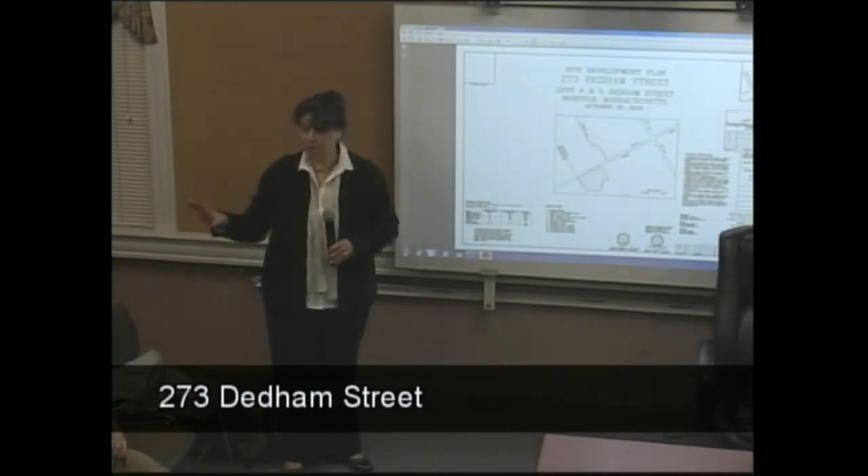The lots will remain in the ownership. There's no intent to divide the lots or convey any of them. So I don't think we're going to be looking at an ANR or anything like that in the future. The lots are all independently conforming to zoning, lot area, and frontage. And with that, I think the technical aspects of the site plan can be addressed by Jim. Before you do that, just point out the different lots so that we all see.

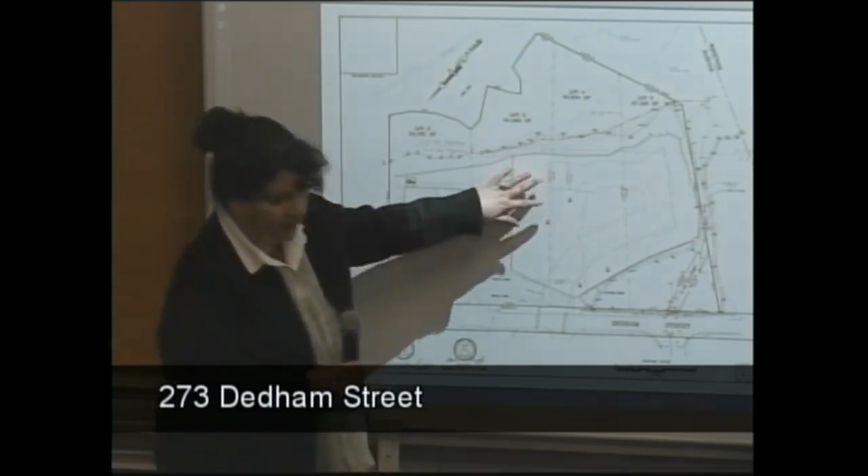So this is the existing building on 269 Dedham Street. Where's the boundary between that and the next lot? This is the boundary between 269 and 271. This is lot 2, lot 3. Lot 4 and 5 are together known as 273 Dedham Street. Okay. So you're working on lots 4, 5, and part of lot 3? The only thing that is, I think, over the line just a bit is some parking. Some parking and the snow storage.

Parking and snow storage. Right now, are these listed separately in the registry, these lots? Are these listed as independent lots? They are included on one deed, but they are separately described, and in the past they had been conveyed separately. They are also assessed separately. Lots 4 and 5 are assessed together as one lot, but lots 2 and 3 are separately assessed.

Because I believe to have this plan go forward, these things have to be combined as one lot for purposes of recording our plan. I don't think you can keep these, I don't think you're using the side setbacks and conforming to zoning based on a certain parcel. I believe that parcel has to be combined all as one. I know in the past, that's the way we've done it. The building on lots 4 and 5 will independently conform to zoning.

No, I understand, but you're putting a project on lot 4, 5, and part of lot 3. My understanding is all of that should be inclusive on one deed at the registry for purposes of this file. Maybe I'm wrong. I'm not sure there's any requirement for that. We can check it out.

Recording, I know in the past, we've had them combine the lots before we issue something, because right now we're using setbacks over a combination of three lots. I believe that's the setbacks obviously don't, you're going over. Right, so they have to combine these, yeah. I think you can check, but I think you're probably gonna find you have to combine these because your project is going over independent lots.

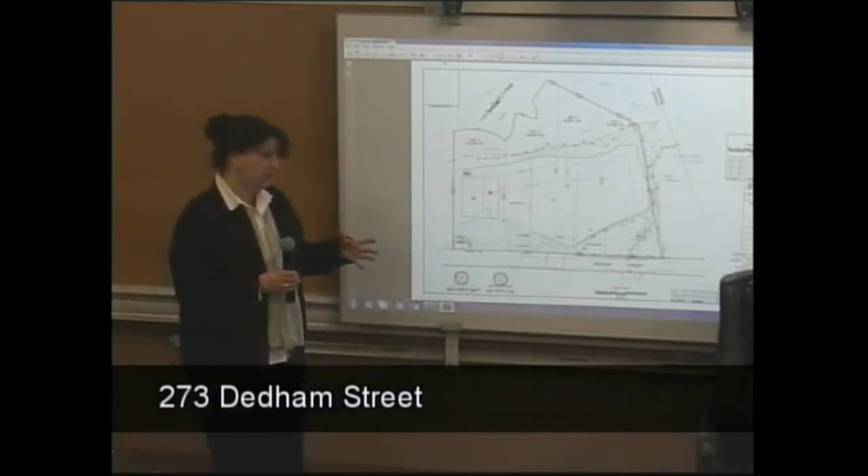Well, I don't think, in my experience, that that's the case. I think, you know, there's lot 2. Are you talking about for the purposes of the use or the dimensional? For the purposes of recording this site plan. It can be recorded and reference all four lots. Well, we can check with town counsel, but in the past, I know that when we've had adjoining lots with one project, we've had the person, after approval, before recording, have these all combined into one lot with the site plan recording. Okay, I'm not aware of that requirement. We can check and see, that's for sure. Yeah.

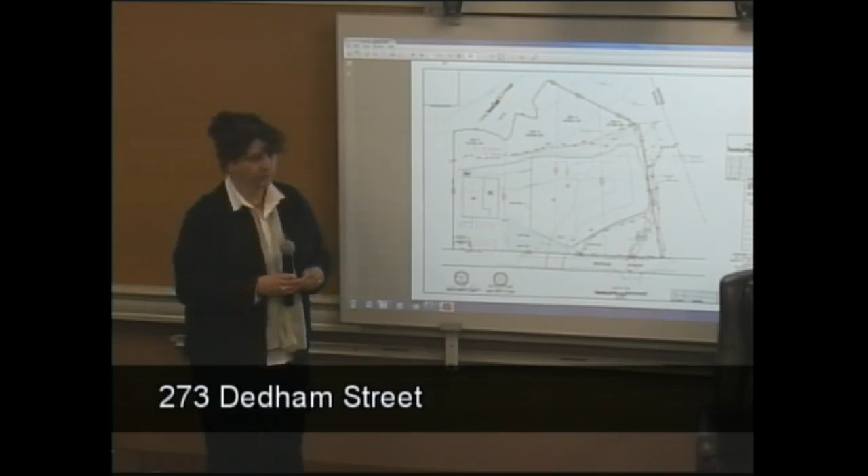Any other questions before I hand it over to Jim? No? Jim, you wanna? Sure. Good evening, Jim Soucy with United Consultants. Just identify yourself for the audience at home. I thought I did, Jim Soucy with United Consultants. Thank you, Jim. Not a problem.

We have the existing conditions before you of the entire site. The existing building is here, tree line in this area here. If you're familiar with the site, this is that 10 or 12-foot high steel fence, curtain, whatever you want to call it, and there's a chain link fence that runs across in this area right now. We do have a wetland along the backside as well as a riverfront and wetland down this side. There is an intermittent stream from the drainage that comes off of Dedham Street, comes down through here and then out and becomes part of the larger system out in the back.

Again, based on that, we have the 50-foot and the 100-foot buffer zones to that. There is floodplain in the rear. This line here is the limit of the floodplain based on the elevation from FEMA. Again, this is all currently wide open. There's a portion of it that's paved, and everything else to the tree line is gravel. Can we go to the next page, Beth, please? While you're doing that, you don't own that next lot over to the town line there, do you? No.

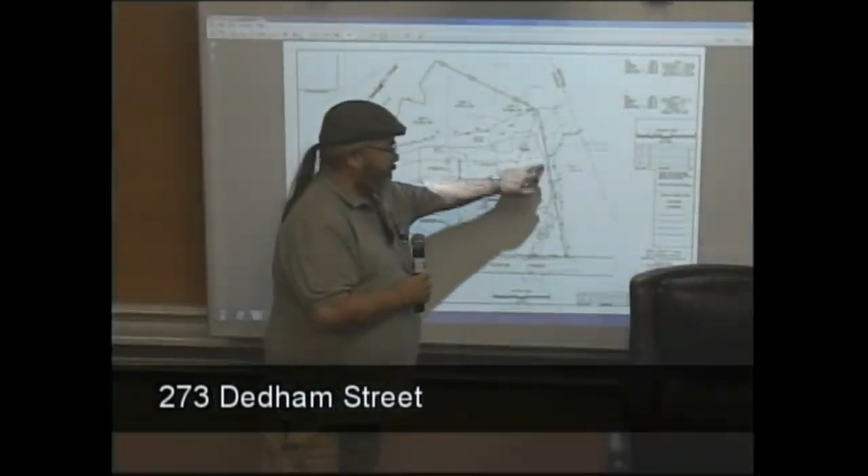Jim, where's the water flowing, basically? You don't have any structures here, right, drainage? Is the water flowing towards the back? Basically, it's going to be a sheet flow this way, John, to the sedimentation basin and the detention pond. Will it infiltrate at that basin? No, it will be detained there, then it will come by pipe to the rain garden, and this is where we did the soil testing to have the infiltration. Okay. Now, we did have a chance to go over Beta's review, and they had suggested an underground detention here instead of the rain garden to pick up the roof and the overflow from the pond. That's something we will look at along with all of the other comments that were on the letter today.

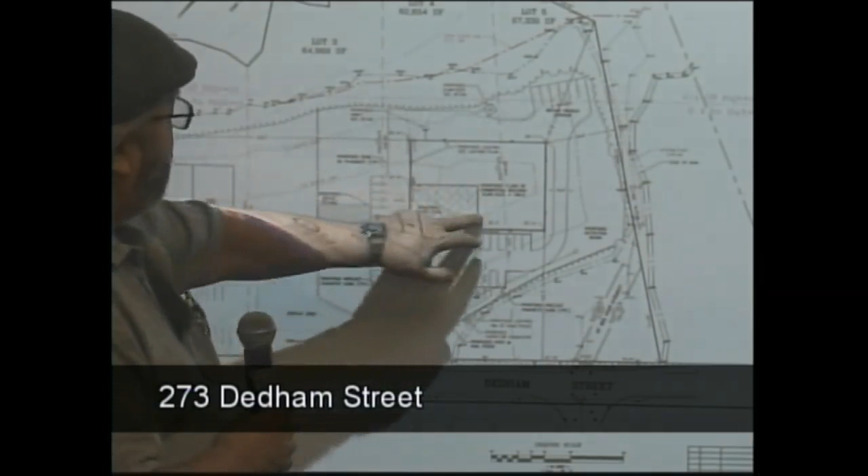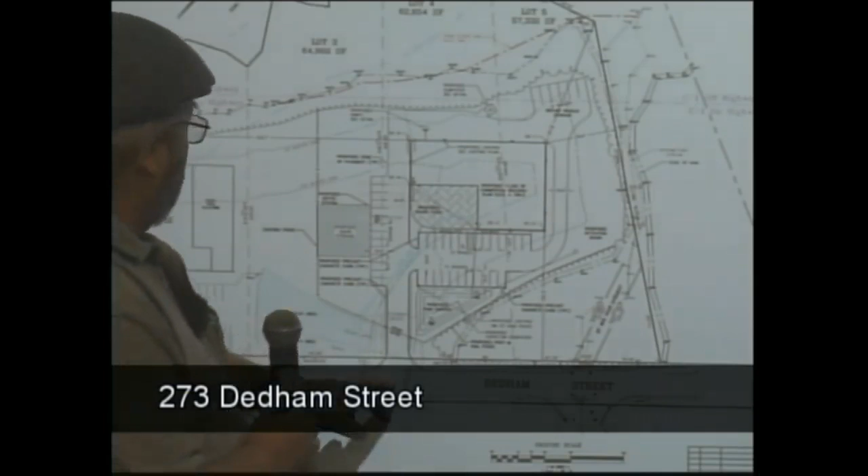So basically, the site layout, the building would be in this location here with like an open patio for a display of smaller lawn vehicles that are sold. Driveway would come in here. I've tried to align the driveway straight across from the one from the Eagle Brook. So the driveway would come in, there would be parking in this area, parking along in front. The driveway would go around the back, and we would have emergency vehicle access in this area here. Off the back side of this parking would be the snow storage area. Next, please.

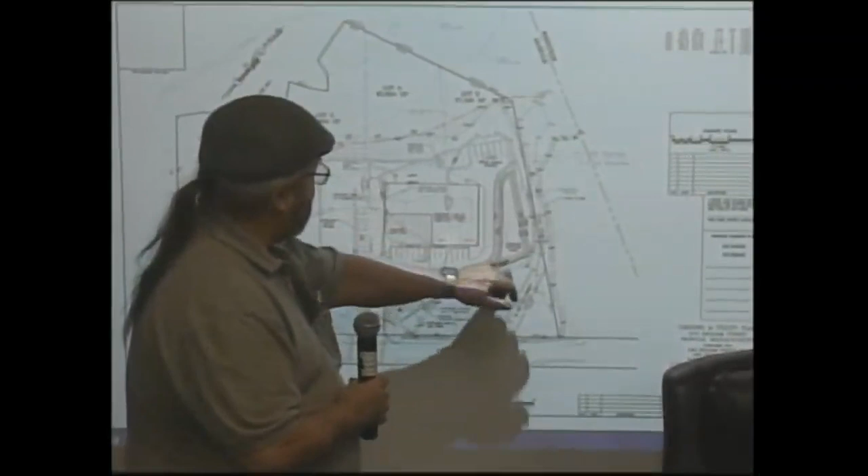So you can see here with the grading plan, everything is pretty much sheeting this way. All the runoff would be captured here in a sediment forebay, which would then go into the dry detention basin. That overflow would be piped to the rain garden. We also have the roof leaders tied into the rain garden. And then in this location here, we have an overflow dissipator rather than just have an outlet pipe that would shoot directly into the wetlands. I've designed a structure surrounded by stone, so that would come into that, and then as the water filled up, it would then cascade over in a broader, shallower method than just having a pipe shoot out.

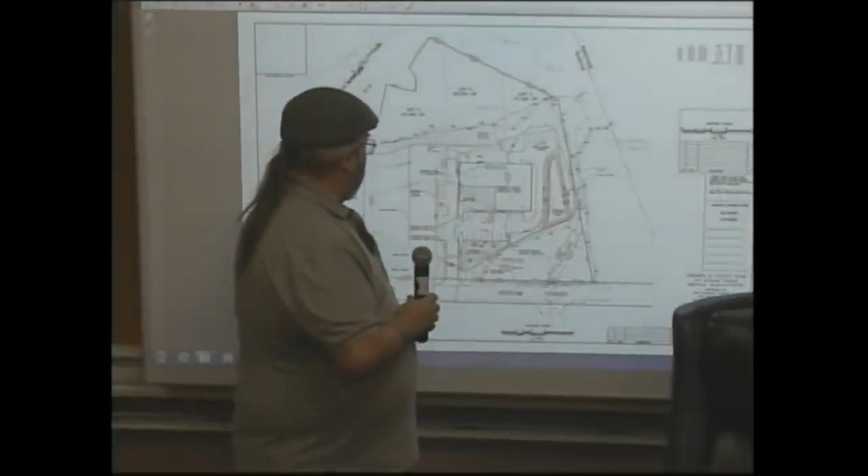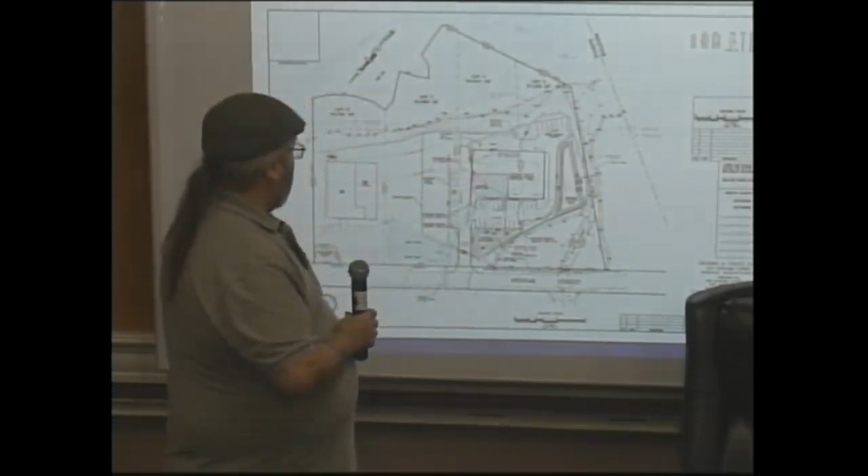Again, for the floor drains in the building, we would have the industrial wastewater holding tank out in the rear here. We have shown concrete curb, vertical concrete curb in this area to here and in here. I did notice in the peer review comments that it was your discretion as to whether we could have the waiver for the concrete curb as opposed to the granite, and he did note that he would like to see a berm around the rest of the parking area.

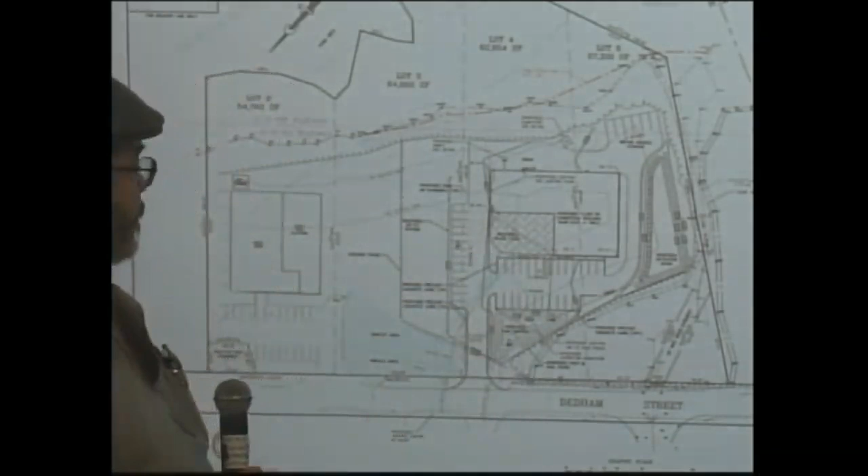Septic system would be in this area here, tank under here, come out. Water service, there would be two separate services coming in, one for domestic, one for fire protection. Next page, please. Before you switch, sure. When the overflow comes out of the rain garden, where does it go? It would go into the wetland. Via that little stream there, huh? Yeah, basically there's a huge wetland in this area that was, I believe, caused by this drainage outfall coming in and going. Gotcha.

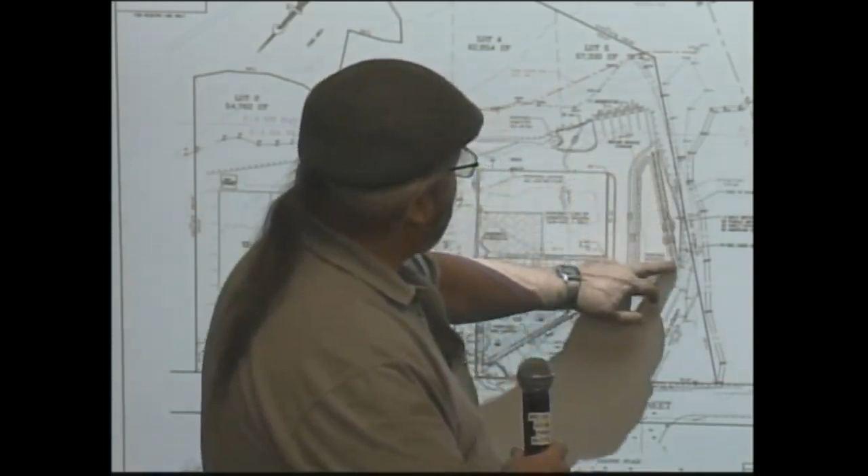This is the landscaping plan, which again we have several large shade-type trees here, and along in here. Infill would be with some shrubs. These islands, this island, shrubs along the backside there. Again, the rain garden has its own plantings, which that planting list is shown in the detail pages. And I believe we had another line of shrubs along the top of the berm there for the detention basin.

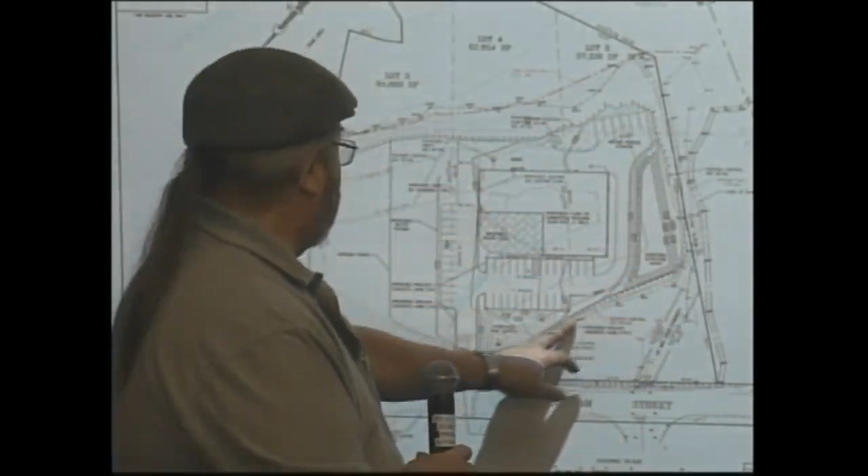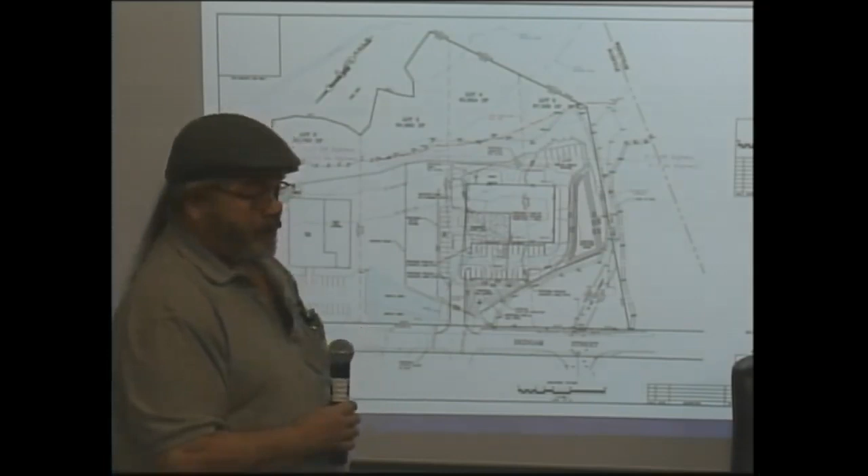Erosion control plan, basically we would start with an erosion control measure here, come here, pretty much all the way around the perimeter and tie back off in the front so that nothing can get out to the resource areas. Lighting plan, we're proposing building mounted lights in this area here, a couple here, and I believe 2 pole mounted lights here shining back. We have no spillage onto abutting properties with the lighting, and they are the shoebox style for direct downcast of the lighting.

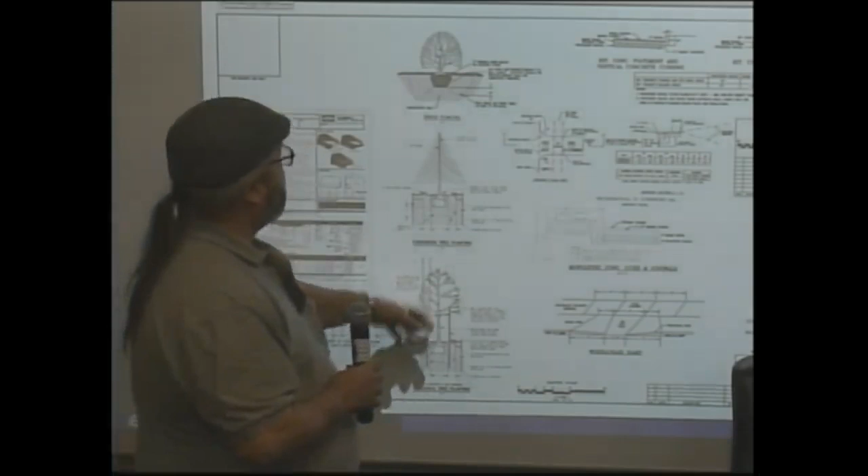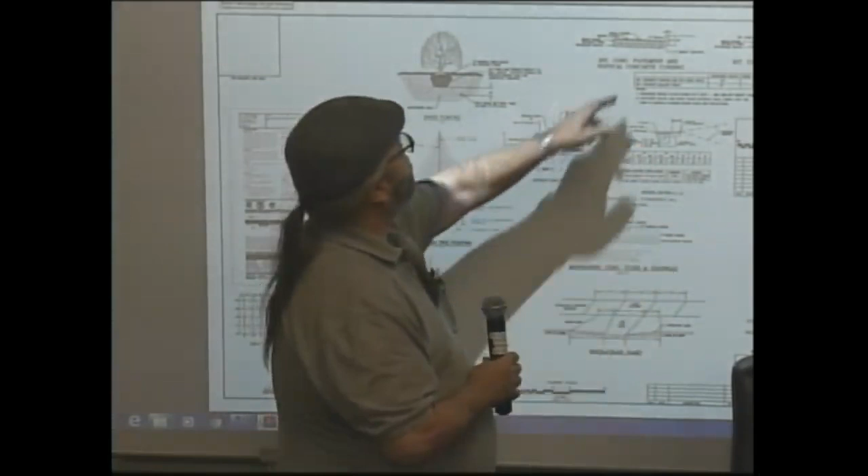And then these are just the construction details, showing the details on the light and the spec sheet on the light, tree planting and shrub planting details, the monolithic sidewalk curb out in front, wheelchair ramp detail, pavement sections. Again, more details, typical trench, water service detail, water connection detail for making the tap into the street and running the fire protection separately.

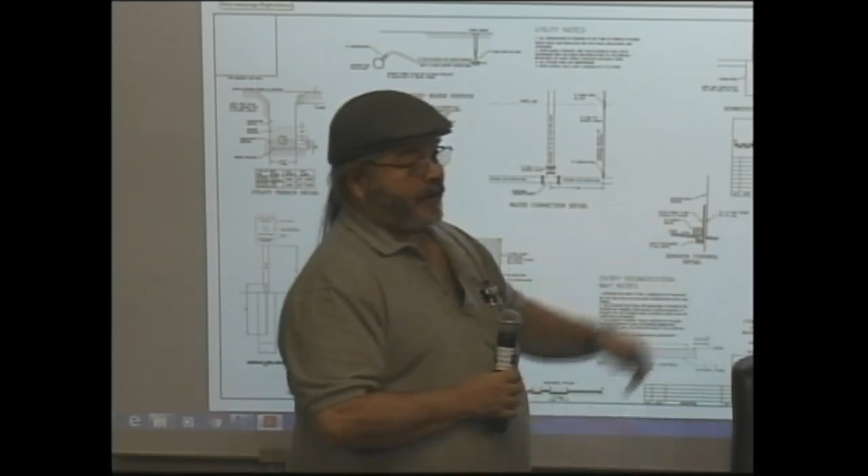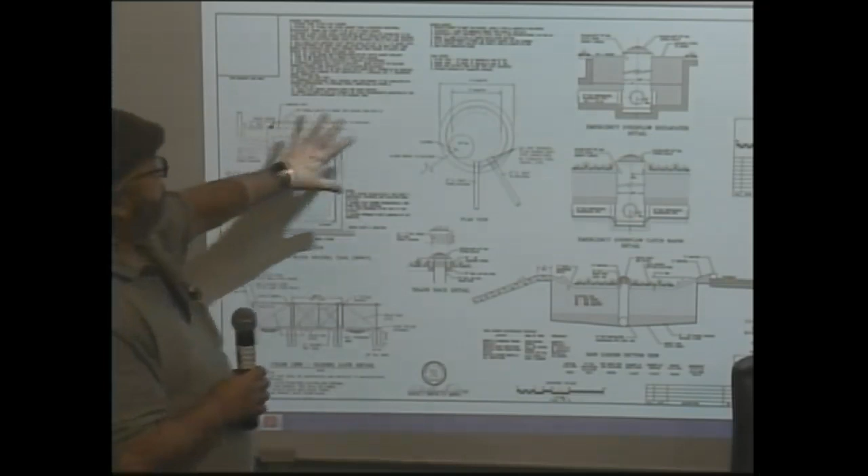The erosion control would be a 12-inch compost sock with a filter fabric fence behind it and an orange construction fence behind that to keep any debris from blowing off the site. The sedimentation entry mat here with details, the dumpster pad and the fence, and some typical sign details. This is the detail of the industrial wastewater holding tank. Chain link fences, sliding gate detail for the entrance.

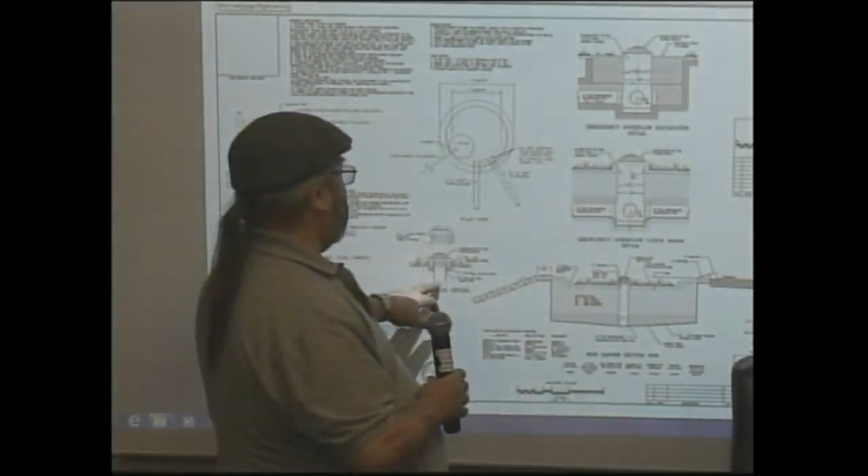This is a cross-section of the rain garden. Then within it, there are emergency overflow catch basins. There are several riser pipes as part of it that go to a drain underneath and outlets. And then this would be a detail of the overflow dissipator, which again is this 18-inch PVC catch basin with, I believe, 3.5 foot of stone all the way around it.

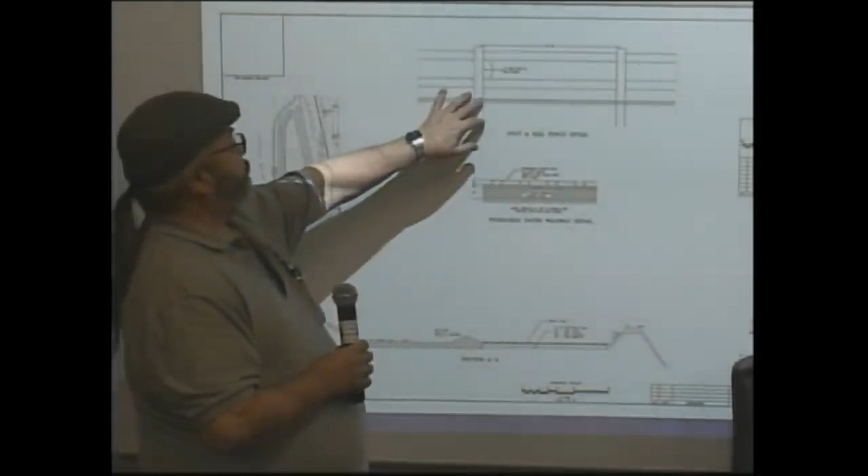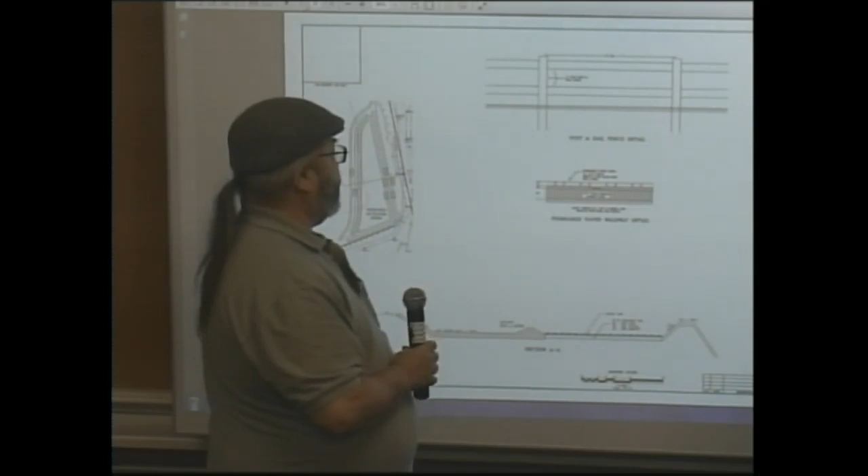Here we have the post and rail detail where the big high steel fence is now. That will all come down, and we'll install a post and rail fence along that area. Detail on the permeable paver patio out front, and the layout of the detention pond and a cross-section through the pond to show how it would be constructed. So Jim, where is the fencing right now? I'm having trouble following it. Betsy, can we come back to like page 3, please?

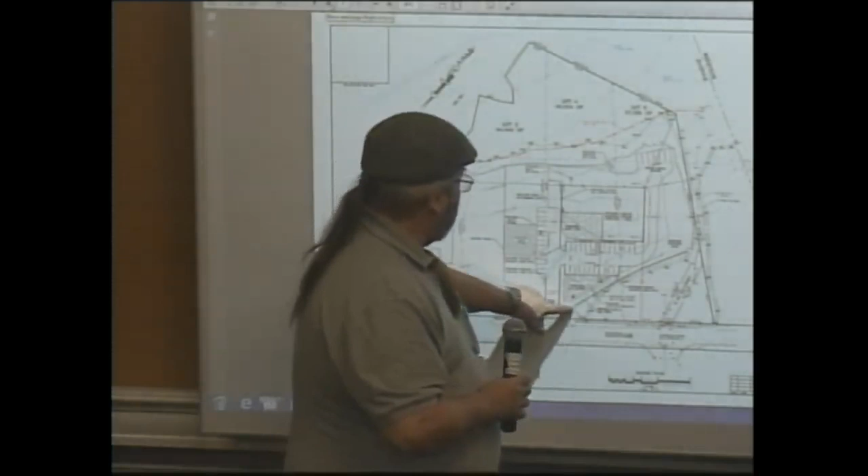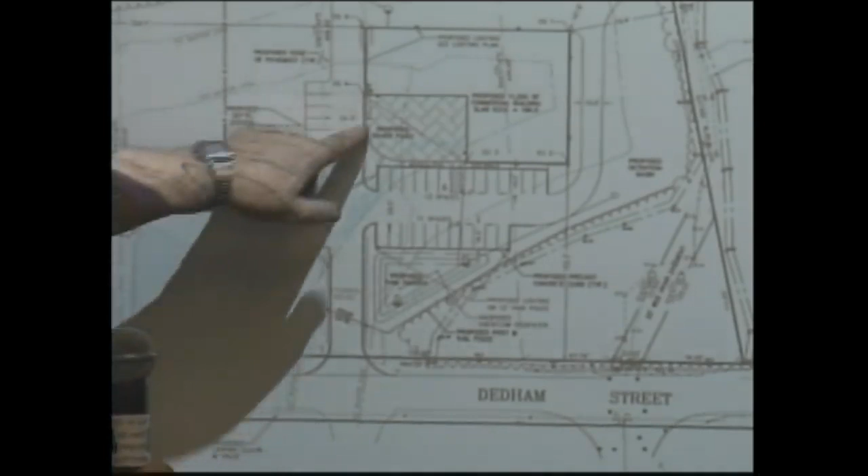Okay, we're good. Right now, John, that huge fence is in this location here. We're gonna take that down, and then in this area here, we're gonna replace it with the split rail fence. So the current display is in the front of that fence now? Where's the display right now? Right now, the display area is in this location here, okay? And it actually extends out to about here. So we're gonna be eliminating this section of the existing display. Right. We want to leave this, and then he could have some display up here for the mowers and the snow blowers and the smaller yard equipment that he sells there.

So this is gonna be a sale of used vehicles and repair, is that it? So you need what, a class 2 license? Is that what you're in, a class? We have. Okay, so it requires a class 2 license only? Okay.

I know the zoning on this is tricky. I know that you had some conversations with the zoning enforcement officer. He was supposed to give us a review of his thoughts, but this all came in kind of late, so we'll probably have it before the next meeting that he can send you, because some of this is grandfathered, correct?

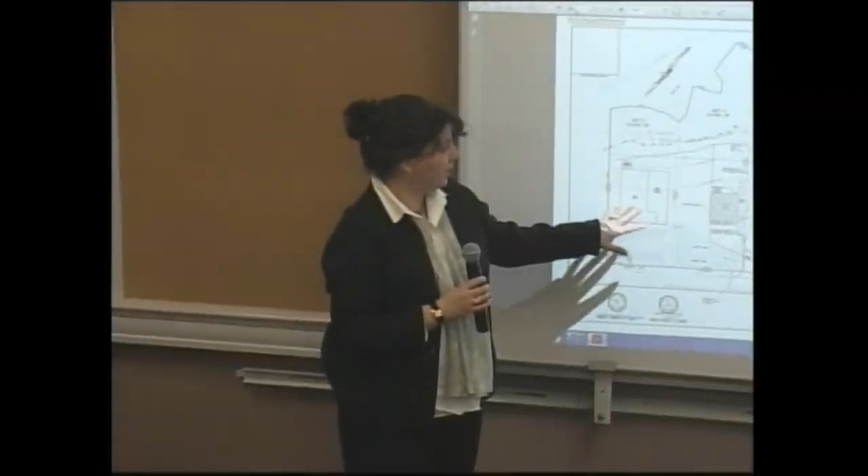Yes, in 1981, a special permit was granted to allow the auto repair use on 269, but the special permit does benefit all of the parcels. So we actually discussed this with Mr. Bullock last year, and town counsel agreed that the special permit could be applied to all of the lots.

I asked, because he said he had some issues with it, and what I'm stuck at, it gets back to the individually parceled lots. We can check on the special permit and the grandfathering that goes with that, but the special permit normally pertains to a use on a particular location. Why would it be granted to 3 other lots that were not in use? We're going to have to find out.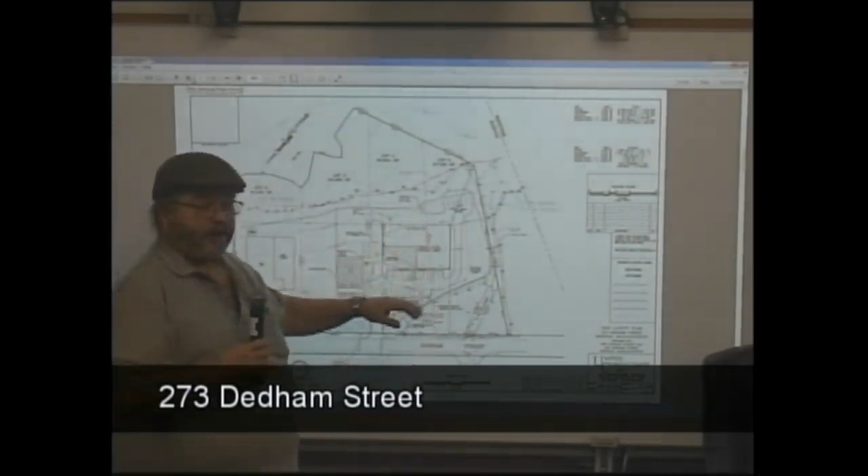I actually think that's a great point. Does the rain garden, Jim, have to go there because of the elevation? Well, if our suggestion from our consultant is to put an underground drainage tank, underground recharge as opposed to the open rain garden, that really takes care of that surface area too. I just have one question as it pertains to that. Would I have to go out and do additional soil testing, or have we done enough soil testing on the lot to satisfy?

So I don't think we were able to ascertain from where exactly your tests were. But I would recommend that you do additional testing to potentially put it in a better place and provide greater information. Okay, so if we are gonna move this over into this area here, we would have to go and do soil testing in that area. Yeah. Okay, I just wanted to clarify that.

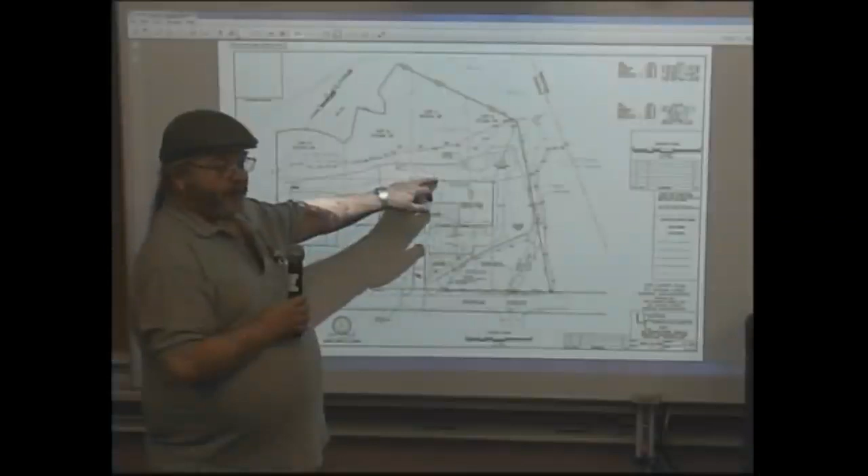As a minimum, Jim, you have to have test pits underneath that underground storage tank, by our rules, I believe, just to make sure there's a 2-foot separation to groundwater. For this tank here, Joe? If you put a tank out the front where the rain garden is, underground recharge, yes, you've got to have test holes there just to prove the 2-foot separation.

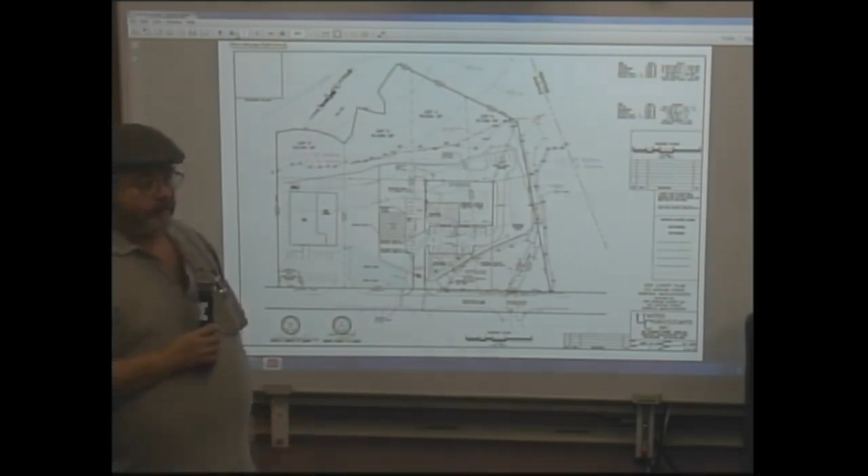Like I said, we've got a test pit there and a test pit there for the septic system, and we did 2 other test pits in this location here. Right. They need to physically be underneath where the recharge structure is going. Right, that's why I just wanted to clarify whether we needed to do that, or if we had enough soil testing on the area to verify these are the soil conditions. We don't have a problem doing additional testing. I think you folks have an opportunity to do a real nice setup here. And, you know, see if we can help.

Do you have any elevations of the building yet, or haven't you got that far? No, they're still in the works. I had some preliminary ones. Oh, all right. That'll work. At least it'll give us an idea what your thinking is. Oh, here we go. So is the project primarily sales or a combination of sales and maintenance? Sales and service. Of what kind? It'd basically be automotive and small engine. Okay.

So which building would be facing the roadway? I think the top one. But the garages would be in the back? Yeah, the garages would be in the back, correct. We may have a door on the side, just for better access. Okay. And this fence right now, that's existing, the one going down perpendicular to the street? Correct. Is that a stockade fence or chain link? It's metal siding, yep. And that's staying? No, that'll be coming down to the post and rail. Okay.

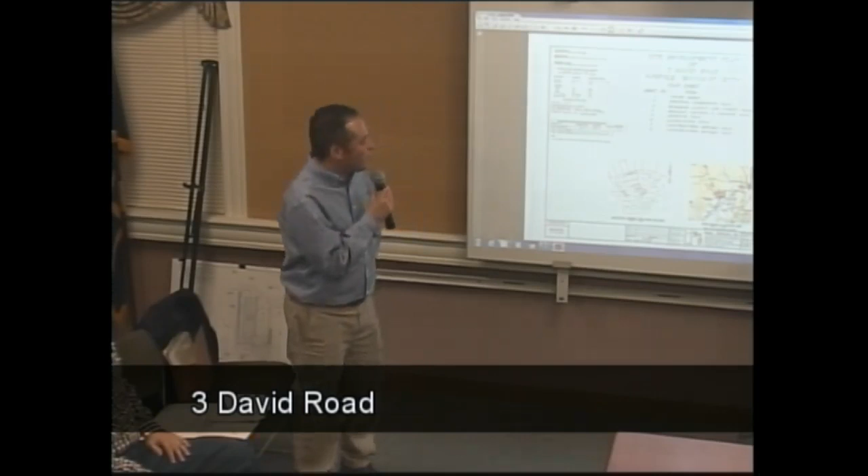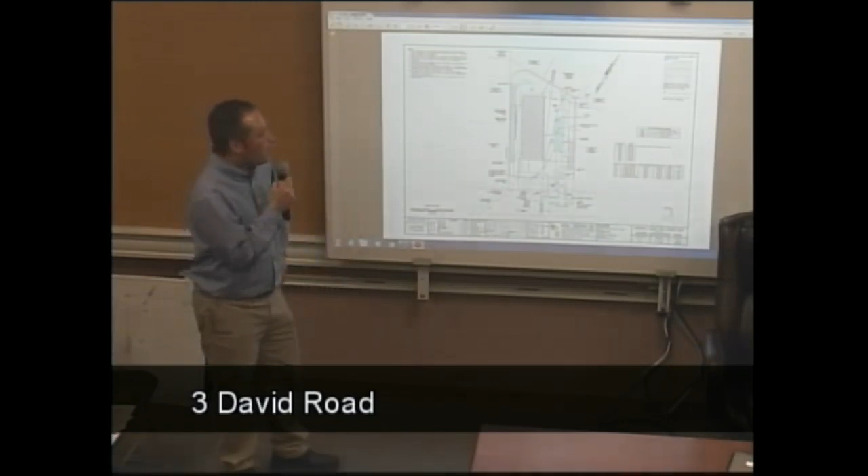I don't know if the best way is to put the drawings up, Betsy. Maybe you can just start with sheet one. I know we haven't formally been before the board with this project because it got continued, but the basics are: it's a less than an acre commercial lot within an existing commercial subdivision, and we're proposing a 6-bay commercial building, shown over here, with associated grading, stormwater, utilities, and septic system.

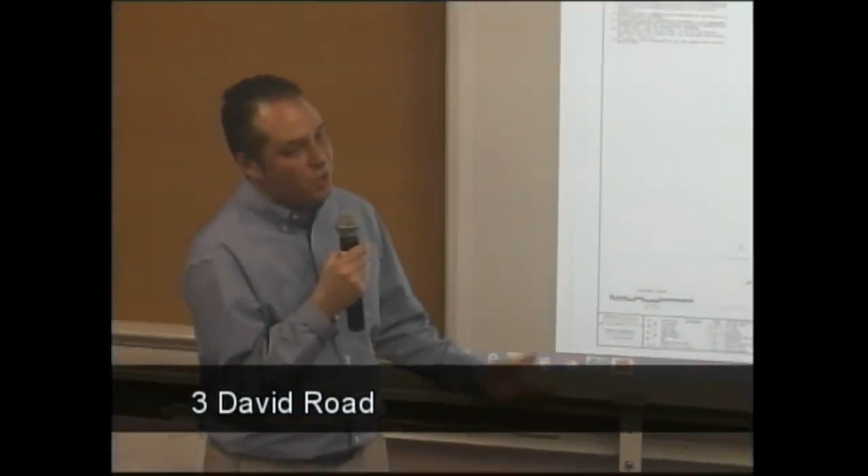We submitted a number of months ago. We had some back and forth review comments initially from Beta Group, and we had a great meeting with them back in November. Since that time we've modified this plan, the main driver being the drainage design, to work with the setback requirements. Maybe we could flip to the sheet we just submitted in the last day or so, which is also sheet 3, but a newer version.

I can explain the changes for the site. So is this lot pitching up to the back of the lot? It is, yeah. I'm sorry, I have trouble reading these numbers. Existing conditions: we've been working on this lot about 15 years. At one time it actually was cleared; it's since grown back in. It slopes from west to east. So there's a cut on the back of the building and a little bit of fill in front of the building where the parking lot is.

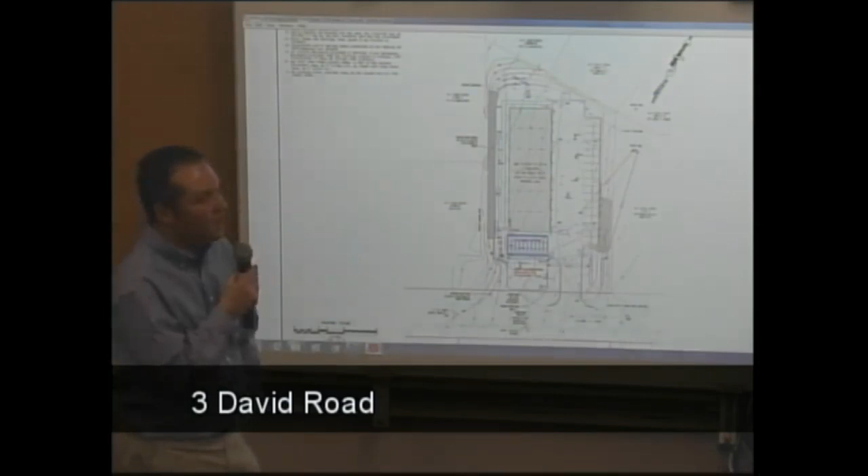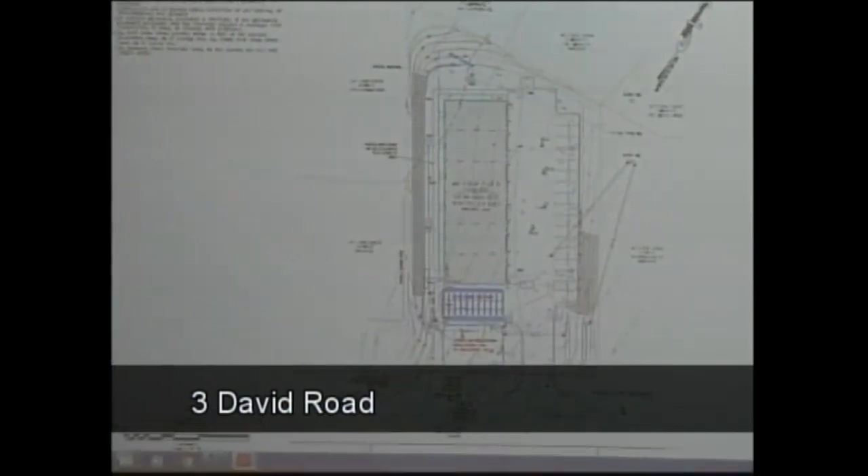There's 15 parking spaces, one handicap. It's a 7,450 square foot building. Again, with the 6 bays, there'll be a limited number of employees; we'll get a final count with the septic design. We met with Phil and Richard from the town back mid-November and fleshed out a lot of the review comments. So I'm hopeful that what we're presenting works for everybody and we can move forward based on this.

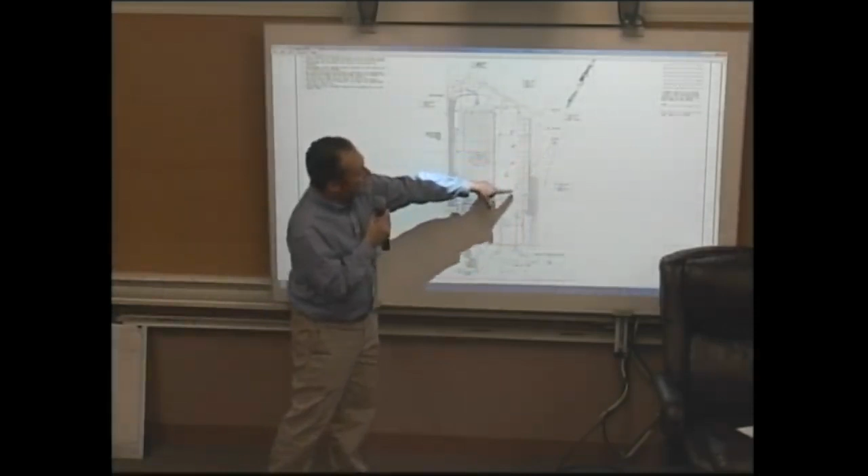The changes we've made: we've moved the septic system down into the southeast corner. That frees up space so we can get the 50-foot separation distance to the infiltration basin and infiltration chambers at the front of the property. It also allows us to maintain the well setback, which was a lot of the discussion. We're exceeding the 100-foot well setback to the nearest well, on the abutter's property. The well for this site is up in the north, and some abutters also have wells up here.

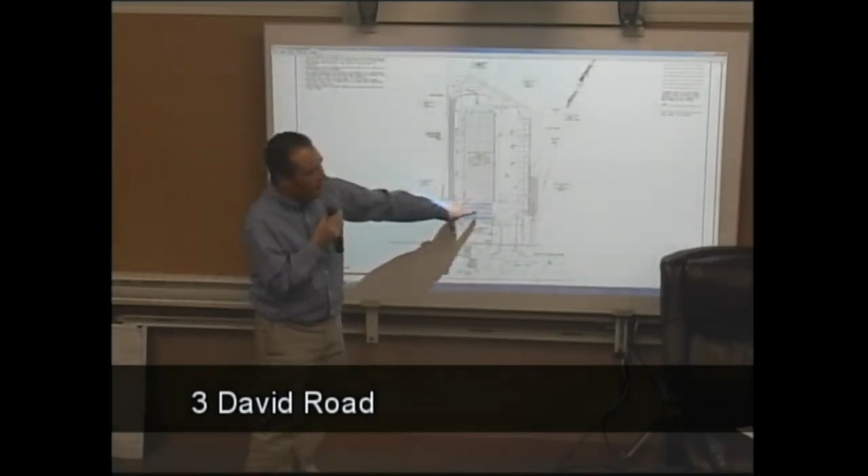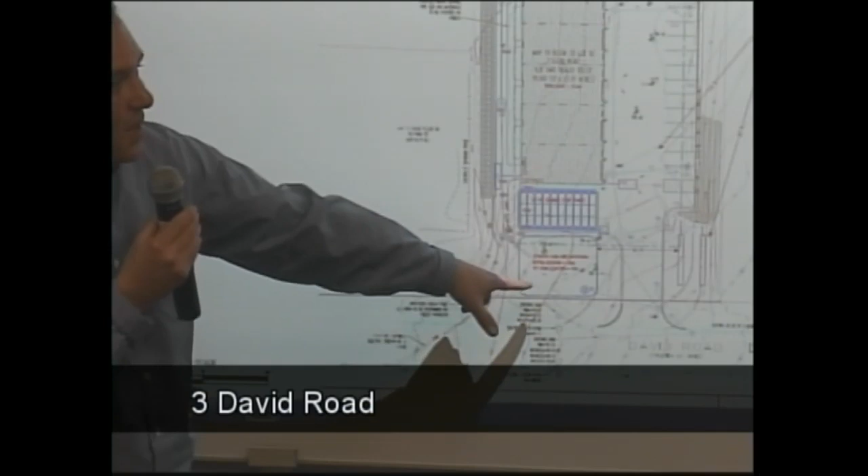We've also separated the roof drainage from the rest of the site drainage, going into the chambers beneath the parking lot. A new feature, in addition to moving the chambers, is a detention and infiltration basin at the front of the site. That allows us to meet the setback requirements to the well and the septic, and we've also adjusted the groundwater accordingly. That was another item we talked about. This design accomplishes those goals. What we'd be looking for...

What do you mean you adjusted the groundwater? The groundwater elevation we used for the design was at that particular time, so we were asked to make a further adjustment to what it could historically be. It's often done for septic systems to make sure you truly hit the highest groundwater possible. So you put a correction factor on there? Yeah, we did with this design. Okay, thank you. Sorry, didn't explain that.

Are these soils decent out there? They are. We saw perc rates that varied from less than 2 minutes an inch to 20 minutes an inch in the initial area where we were planning the septic. We're designing at a much more conservative rate. Yeah, he makes you, doesn't he? It's tough. We're designing for the Rawls rate, 1 inch per hour, which is a lot more conservative than we saw.

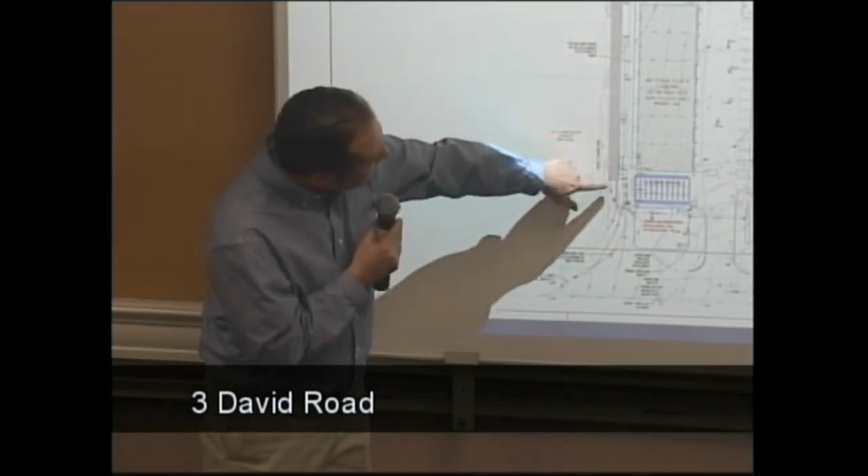So how high are those walls going to be in the back where the grade changes? This is a riprap slope, not a wall. We have a landscape wall out in this front corner, anywhere from 2 to 4 feet high. And what's the riprap slope, 3 to 1?

It's 1 to 1. In terms of cut and fill, what does it look like? It's definitely a net export. It requires an earth removal permit, and so we'll be submitting that within the next week. Okay. And it's really just because of the cut in the back and the cut for the footprint of the building.

Well, you said you had a fill. I figured you might have a net zero, hopefully a net zero. We would have preferred that, but to meet the grading on the east side, you couldn't fill enough. And at the same time, you have the driveway coming up from the existing road. We couldn't get the grade of the site any higher.

Are you gonna be looking for a waiver for the slope being more than 3 to 1? I don't know if it requires a waiver. We showed it as a construction detail with a 1-to-1 engineered slope. It's not a grass slope. I don't know if it requires a waiver to be a riprap slope.

What's the slope on the riprap in the front, to the right? This is also worst case in the corner. It's 1-to-1, and then it gradually... Because you have abutting properties on both sides there, you know? Yes. And as you know, you're supposed to keep your water on your own lot. You're confident that these slopes will contain your own water? We are.

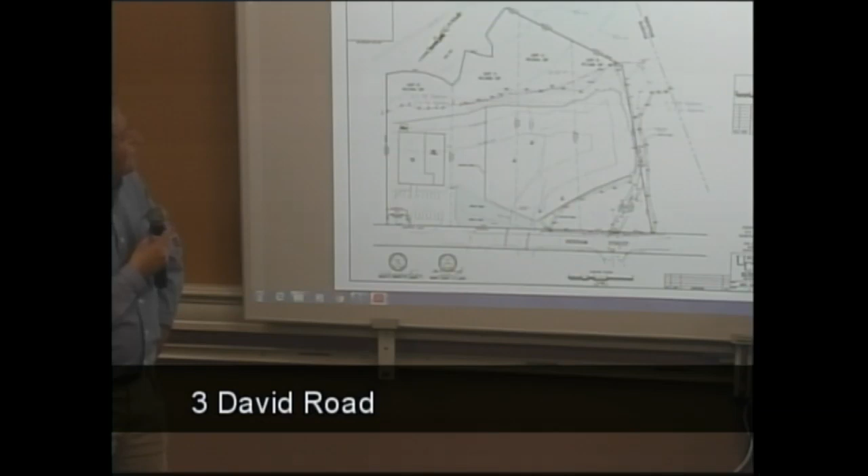Where on David Road is this? If we go back to an earlier sheet, there's a locus, say it's sheet 1 or 2. Same thing, yeah. Oh, that's a different outfit. Oh, wrong one.

And why are we hearing this tonight? They came to us back in September and wanted a site plan review, and it's been postponed and continued, and this is the first time we've seen it. So based on the meeting we had back in November, outside of the public hearing, where we worked out a lot of the technical items and review comments, what we're presenting is the changes. Yeah, there's been a lot of work done off the table, so it should be very close to what we finally end up with.

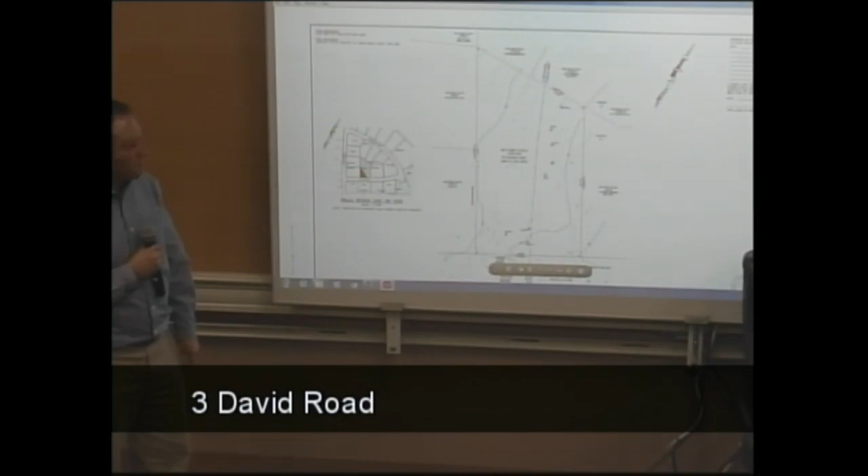But there's the locus of the lot for those who wanted to know. So it's this one right here? Yeah, that's right, Kevin. You can see it on the drawing up there, the red lines. So between the bays and the parking on the right there, is that all pavement? I'm assuming to get into the bays. Right, yeah, it's pavement over here.

Be able to go back to sheet 3, the newer version. That's the old one. So this is the previous version. It's good for your parking question. So the pavement goes all the way from the bays to the... So the edge of pavement is over here, and we have parking spaces along this eastern side. Back of the building, pavement also? No, it's grass up into a sidewalk that goes to each of the back doors.

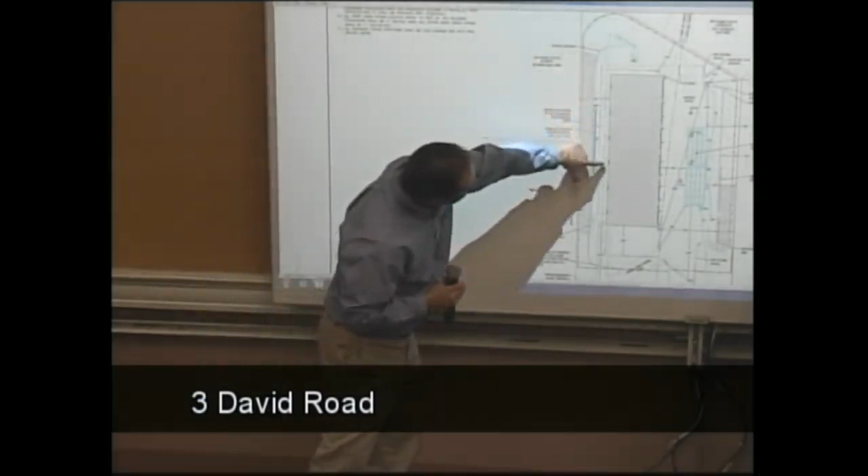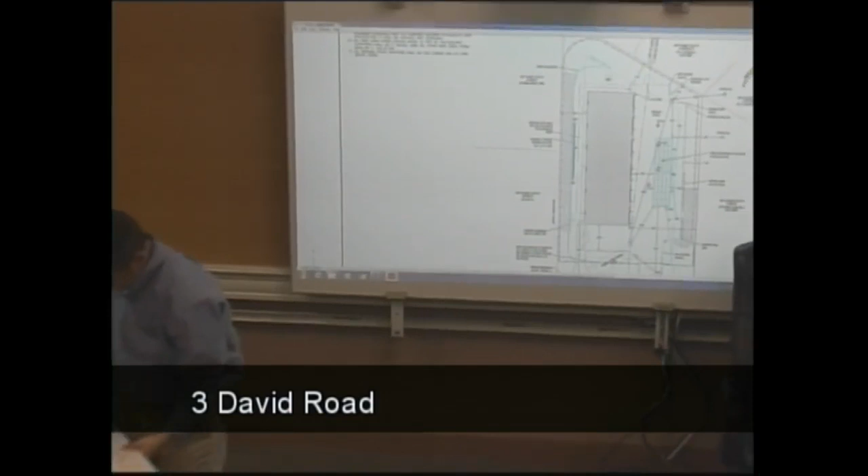What's the lot coverage on this site plan? Let's go back to sheet 1, the cover sheet here. So we're at 57% lot coverage. Criteria is 60. Yeah, it looks more. That's why I asked. We've got a whole 3% to work with.

So one of the things I wanted to go over with the layout we're presuming would work for the drainage changes is we do need to be closer than 50 feet to the building with infiltration. It's a frost wall foundation, so we don't have any construction concerns. And with the infiltration basin towards the front of the site, we would be closer than 20 feet to that front property line. So it's still the same waiver, but it's improvements to that waiver in that we meet the setbacks to the wells. Which probably takes precedence.

And you've got an inclination in the land, which means that the drainage is probably running from west to east, is that what you said? Yeah, it generally slopes in this direction. Southeast, yeah.

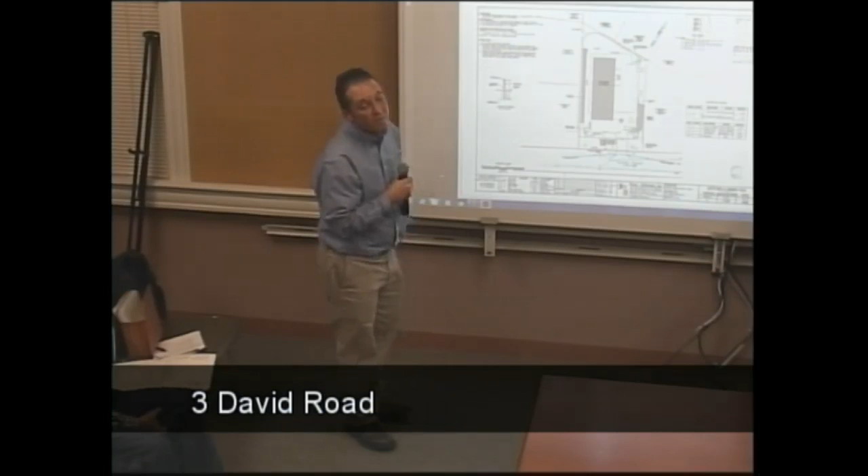Well, I think it's kind of important because the lot coverage and the perks going from 2 to 20, not knowing where the 20s are, and you've got these one-to-one slopes, and you've got a lot of abutters. Really have to make sure that all of this water is contained. If not, you've got watersheds over an abutter's property in the back, in the front, and on the street.

Well, to that point, the parking lot, how is that sloped? Where's the water going to run off to? So we have two low points in the parking lot. There's a catch basin here and a catch basin here. Okay. And so it's contained. We have curbing. Yeah, all right. Yep. So you're looking for a waiver for the drainage basin being too close to the building and to the roadway? That's correct. Okay.

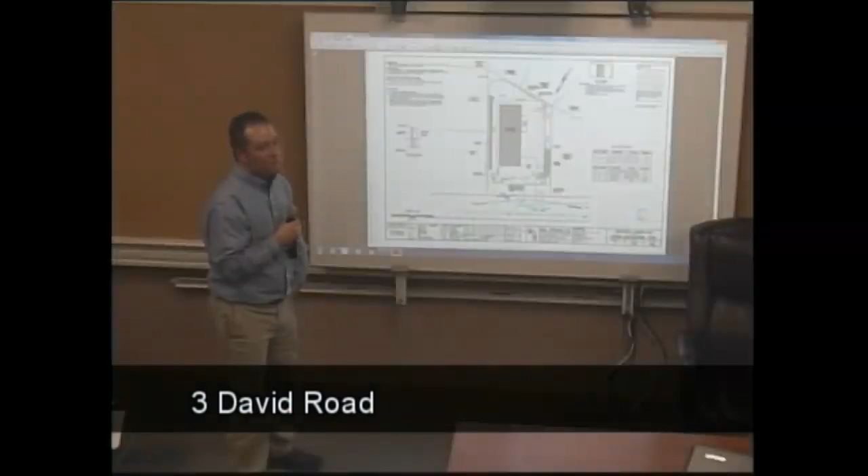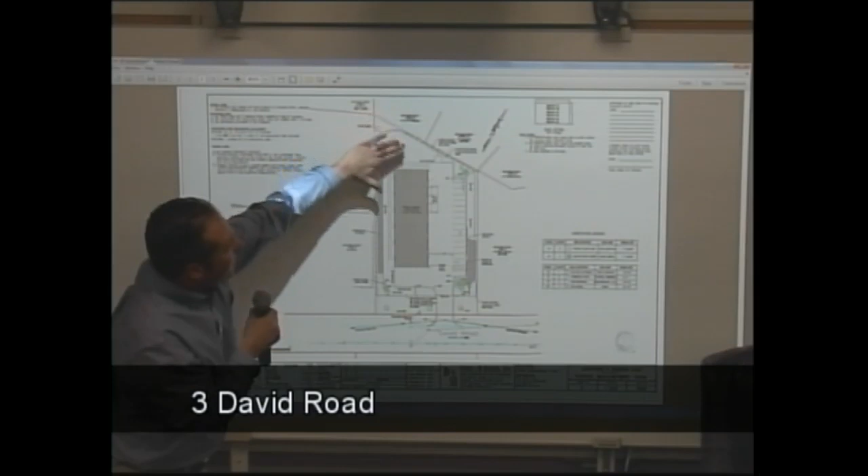What's in that little triangular area up at the end of the building up there? Up in this area? Up in that area, right. So this is a grass slope, and then there's a catch basin over here as well. Okay. Just a grass slope, all right. Yep.

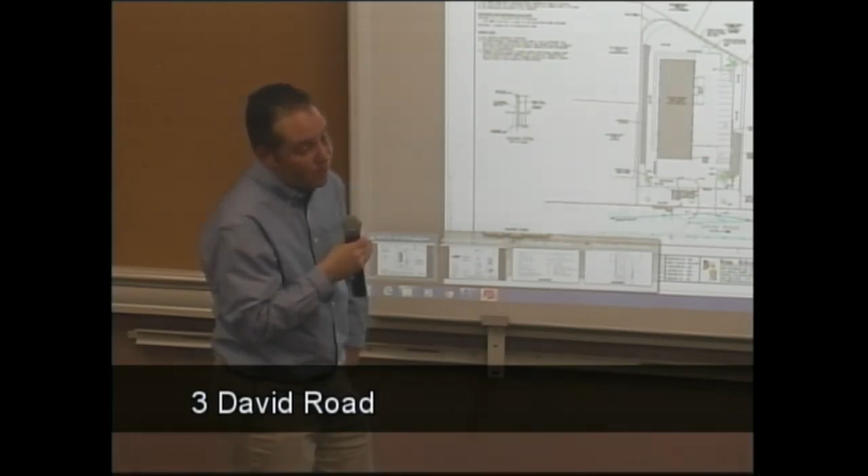How big would the underground chambers have to be if you turned that basin into an underground drainage chamber? Based on our calculations, it wouldn't work, and the reason being is we're not able to make the rate work for the volume with no net change. The infiltration basin is a lot deeper. How deep is it? It's about 7 feet deep. That includes the freeboard, so it's about 6 feet with a peak storm. That is deep. Maybe the deepest one we have in town. Yeah, it'll be for a short duration to meet the volume requirements. If we had chambers, we couldn't meet that requirement.

And so we're basing our design on looking at the lot as being good woods today, which is something we talked about in our meeting, when years ago it had been fully cleared. And so this design takes all of that into account, and that significant change going from the good woods to what we have today. And so there's a substantial reduction, not just the rate, but the volume that we had to meet. And we can't accomplish that with the chambers and all the different setback requirements. If the building were a little smaller, you'd be able to alleviate a lot of the problems too.

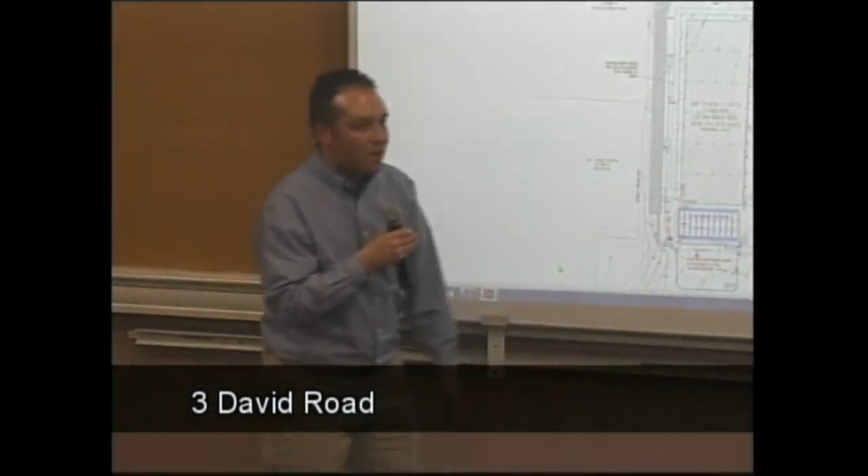What is going to be the use here? There's 6 bays. I can let the applicant speak a little bit more about it, but there's a garage entrance. I think it's mostly storage. But I'll let Marat just explain the use of the building. And I know it's a building he's done before, and that's what we based our footprint on.

Just quickly, I purchased the land 4 years ago. I wanted to bring my business here from Seekonk, Mass. And then I kept changing my mind. And then finally, this summer I decided that I want to go ahead and put the building up. I restore architectural woodwork in the Boston area mostly, or north of Boston. And so basically, we're going to be doing some restoration in this facility partially. I might just use half of the building and then rent the other half to contribute to expenses maybe.

So basically, we do a lot of work on site. So I will probably use the building no more than 6 months a year, because sometimes we take jobs on site and stay for a month or two. And so basically, that's what we're going to use it for. Okay. So architecture, restoration, mostly woodworking? Yes, woodwork. Restoring the existing woodwork in homes. Mantelpieces and staircasings. Exactly. Yeah, okay.

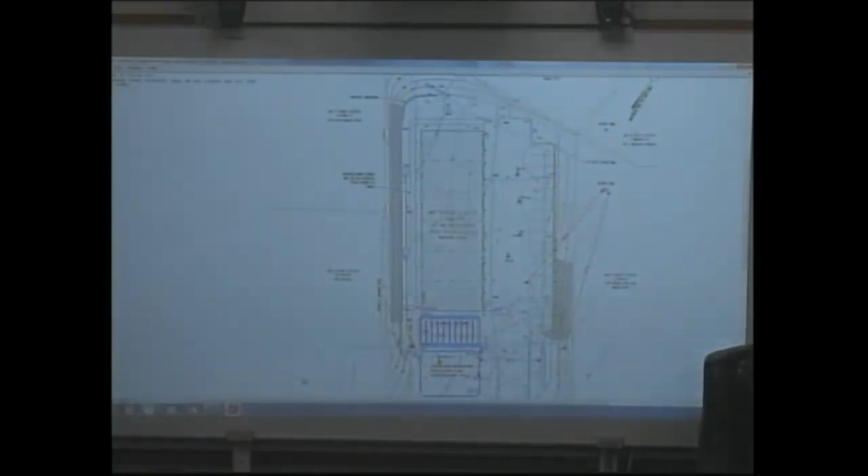So at some point, it could be 6 different businesses, one in each bay, potentially? Potentially, maybe when I'm retired, maybe not. I don't know. Sometimes some people want to rent 2, 3 bays, one business. So I didn't think about that yet. But they're all separate as designed, they have separate utilities. For now. Yes.

Internally, is it one open space, or are there walls that separate each bay? Depending on my usage, I might keep it open, 3 bays. And then depending on who will rent, if they want 2 bays, we want to keep it open. Okay. Do you have a picture of the outside elevation? Yeah, I was just going to ask, do you have any renderings? Yeah, we printed one out. There's still some architecture remaining, but this gives you an idea. Thank you. A similar project he's done. Metal construction on the outside?

Yeah, we understand we need to put together the design review board submission. Do you have a window in the building? I don't see one. Do you have a window in the building? Maybe in the back, up high, just to get some light in. But I would also like to have skylights, not total skylight, but clear roof panels in each bay, so you can get daylight in, save some energy.

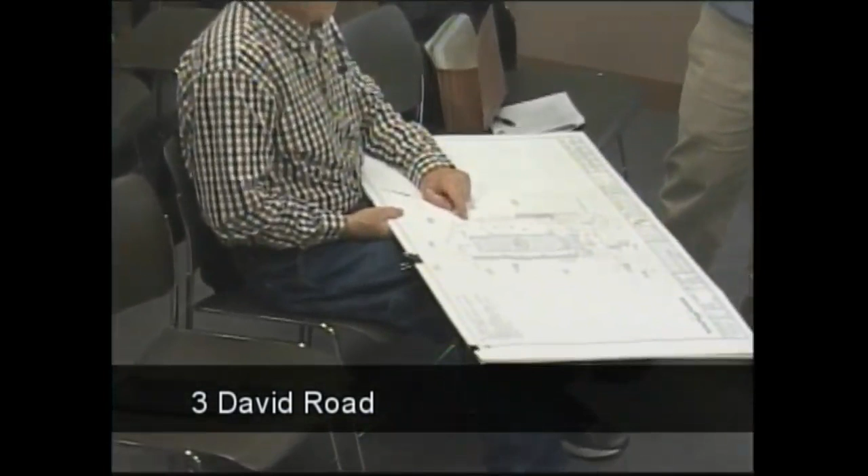Remind me the depth of groundwater up on the northern side? Was that an issue? Yeah, so the test holes in front where we're looking at infiltration, there was none found at 12 feet. The test holes where we previously had the infiltration, it was anywhere from 5+ feet, I can pull out the drawing, I think it's number 3, 4. It was very variable in that area, but down in front it was consistent. We didn't find anything at 12 feet. Where we previously had the infiltration, one of them had none at 120 inches or 12 feet.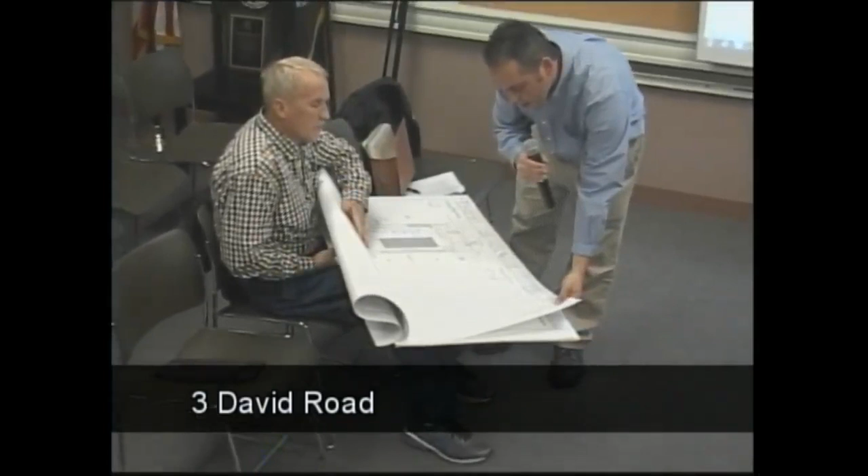Something like this would work with a mounding analysis to make sure. Yeah, I think, I mean, this is kind of tricky. I don't want to have you guys spend any money, but if you do a mounding analysis on this site, you may find that this may shoot your stormwater theory down because you've got mounds in certain spots you don't know of that are going to affect the runoff.

Well, they're sort of different. The runoff and the mounding are different. But it affects the stormwater infiltration. But the point we're making is we need to do a stormwater review. Yeah, right.

So what we were hopeful for, and it sounds like 10 foot is the distance we should be from the building. And out in front, we're trying to come up with a parameter for the infiltration basin so we could put together a final design, rather than just spin wheels and go back and forth, and be efficient for everyone.

Rather than having this 7-foot deep basin, can you construct a swale system and dump some of this water into something that's a little bit less conspicuous and dump it more generally all around the site rather than just having everything dumped right at the street?

Not much room. Yeah, the challenge with making the lot pre-development as good woods, which is the feedback we received, the net that you're trying to meet, it doesn't become feasible unless you can do a larger basin. We had initially submitted it as a different lot coverage based on the historic use of the lot where it had been cleared. If we could go back to that, you get to a point where the chambers might work, and we can look at that. It's a balance we're trying to strike. Or we can make the building smaller.

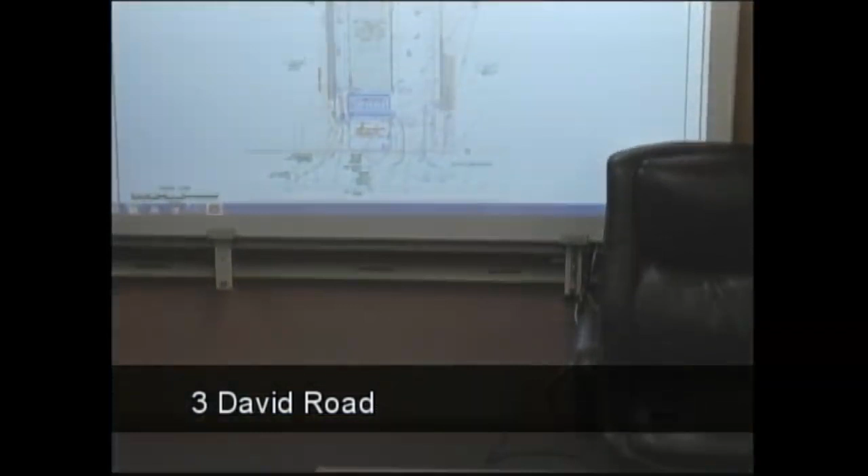I can scale it. We also have them listed on one of the other drawings. You cannot move it much, though. See the building setback line here, Walter? No, I'm looking. See this here? There you go. So he's right at the corner there. That looks like a walkway. He's right at the corner. Right here, see that walkway there? Oh, the blue, yeah, okay. He's right at the corner. Yeah, right here. All right.

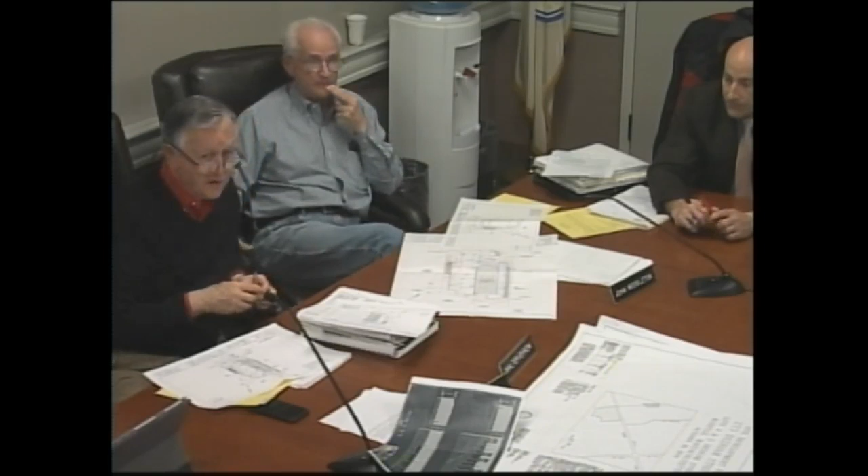I mean, they're trying to get a building that's already been built, which is great, but maybe it has to have some modifications to fit on this particular lot. Yeah, it's a 25-foot setback at that property line. All right, now I can see it on the actual physical drawing here. Well, I don't know, we could look at sliding the building back a little bit. Yeah, absolutely. Slide the building back a little and gain, and not necessarily have to give up square footage of the building, maybe.

If you could retain the square footage of the building, that's to your advantage and to the advantage of the town and the number of businesses we can get going on here. If you can't, you can't, but I'd give it a shot before I gave up. How many feet controls the distance from the parking space to the building, the bays? Can that be reduced? Can we waive that? Stretch the building, change the building parameters a little, no?

Let me just scale it. Zoning board can. ZBA, all right. That will never happen either. I'll have to look at the regulations and see if we can squeeze it. I don't know. Just another question. We also need to get the turning radius into the bays. The turning radius, okay. I think it's the turning radius that drove that aisle width, trying to get into the bays. Are those 25-foot lines there parking on the east side? I'm assuming.

I'm trying to get the distance from the building to the, there's a 50-foot marker there, John. Where is it? Yeah, they look like 9 by 20 parking spaces. My question was, if this building was configured different, you have a lot of space between the building and the parking. If you made this building shorter and wider, you'd loosen up a lot of room, but again, I think the applicant is trying to get a building he's already got a design for, which is one of the problems, because this has all these limitations.

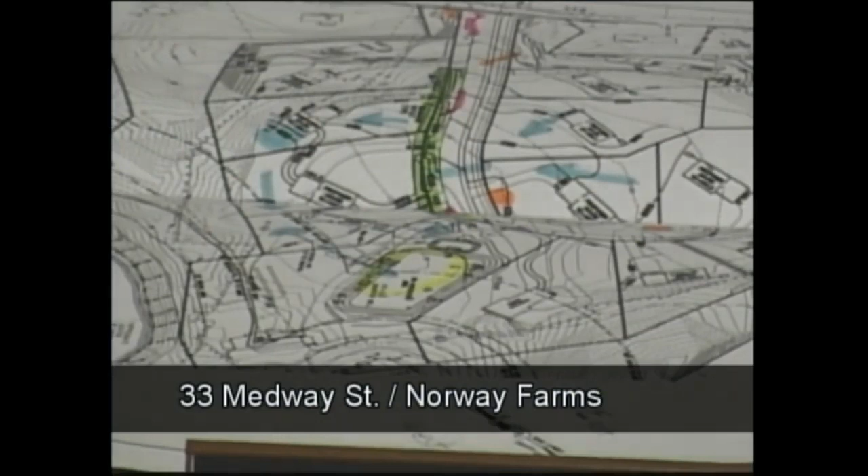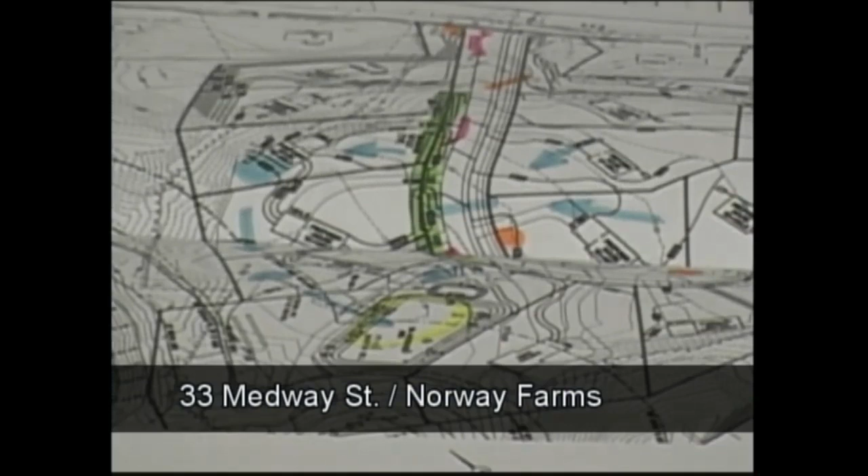I'm looking for the lot numbers. It would be 2 and 3, so when you're driving in, the first one kind of goes into the woods there a little bit, and 2 and 3 are the first ones in the field on the left. Okay. So the plan is, and this goes back to the drainage, we want to build out through the left-hand side of the road going around the cul-de-sac, get that area all stabilized with lawns, so we don't have dust going up to the nearest neighbors, but also keep sediment from crossing over the road.

Okay, so the sequence of events would be to work on that side of the road first? Yes, we're going to do 2, 3, and then hopefully 4, 5, 6 and 7. Is 1 the first lot? One's the first lot that's kind of up in the woods. The house is way back. So we're gonna let that one go for a while. Okay.

I think on this bond estimate, my little pet peeve, they should be labeling the roadway on these estimates. I'm sure this is for the roadway in its entirety. Yes. There should be a notation saying it's the road entirety or from station 000 to whatever station, so we have some detail down the road. If this applicant wants partial release, we don't know. We should make a note that it's for the entire roadway. Do you know what the last station is? Approximately 850. Station 000 to 850, and also put the end of the roadway. Thank you.

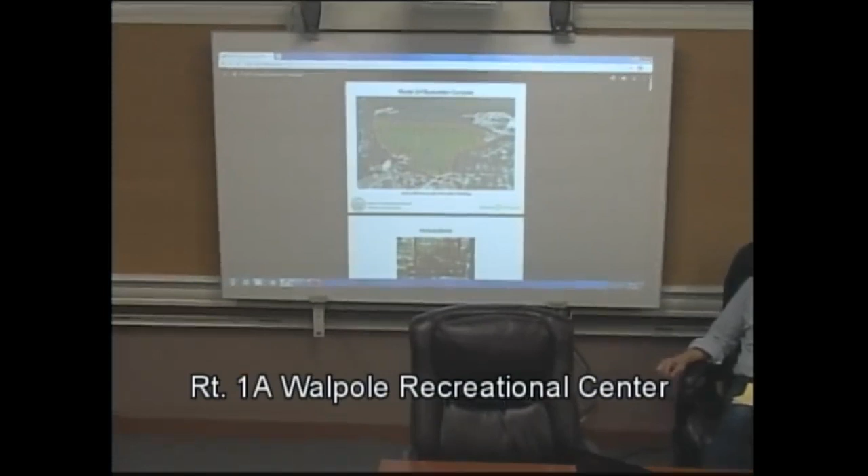It's increasing the value of Southwood and the town, I think. They just built a new police station, a new fire station, a new library. It looked like this had been approved 12 years back, and now it's coming to fruition. They're pulling permits to build it finally; I've seen construction vehicles pull in there this week. It will make Southwood more attractive as a development. There's the chunk of land. See the little insert up at the top? That's part of Southwood, where the water tower is.

That's the town line right there. And I don't know whether that little jog is part of Norfolk or still part of Walpole, but I know it's part of the Southwood property. That's where the... No activity on that, huh? No, nothing recently.

Anyway, can you show us any more of the drawings? Sure. That's just a forest path that goes down through there. But you start to see what they're proposing as these come up, if I can zoom in on that a little bit.

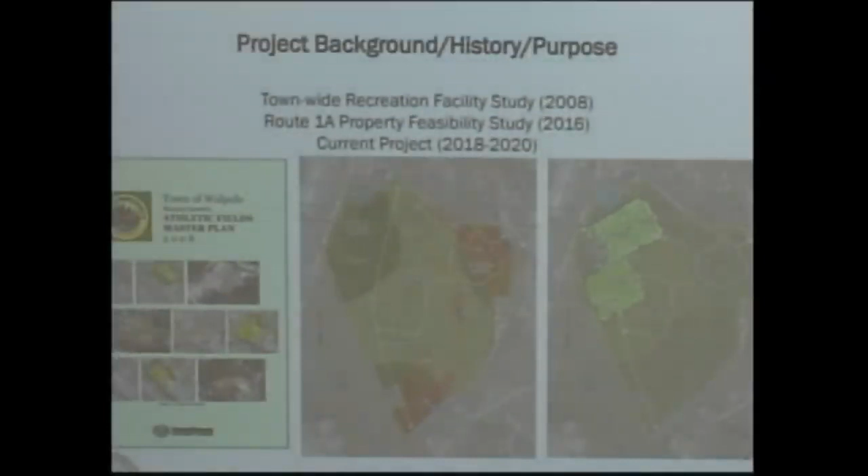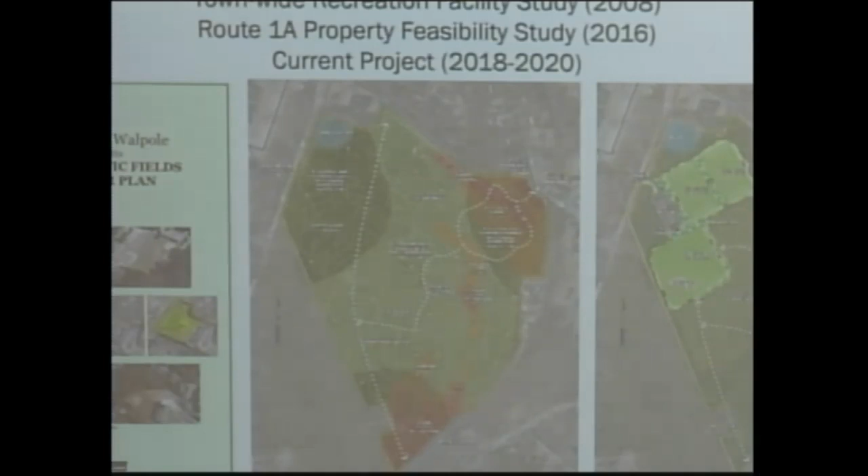So I guess part of what piqued my interest in this is I know there's ongoing conversations about Pond Street. And seeing as how this was a 12-year process, which started with a master plan for recreation fields in the town of Walpole, I'm not aware of a master plan for recreation fields in the town of Norfolk. I think it would be a good idea.

I know Ann Proto has a lot of ideas on what we need, and I know she has thoughts on where she'd like to see them. So here is kind of just buying land? So this is what they're doing now. I think the previous slide was sort of the process by which they went through to get to where they are now. But anyway, it outlines roughly a 12-year process, which is getting them to construction.

So there's probably a lot in between all that. But it is a nice looking development. It was a pretty nice slide, wasn't it? Yeah, it's down the end, I think. Down the end.

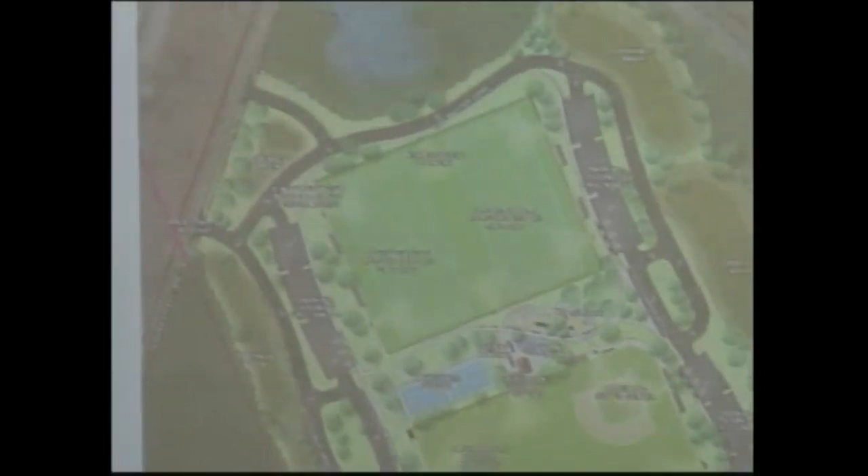Aaron, I might be wrong, but I do believe that we have a recreation space plan of some kind on file. It could be outdated, it could be old, but I do believe we have something like that on file. Yeah, so this is what they propose here. You see the 2 football fields, a couple of baseball fields, a playground in the middle. 2 turf fields, too, by the way.

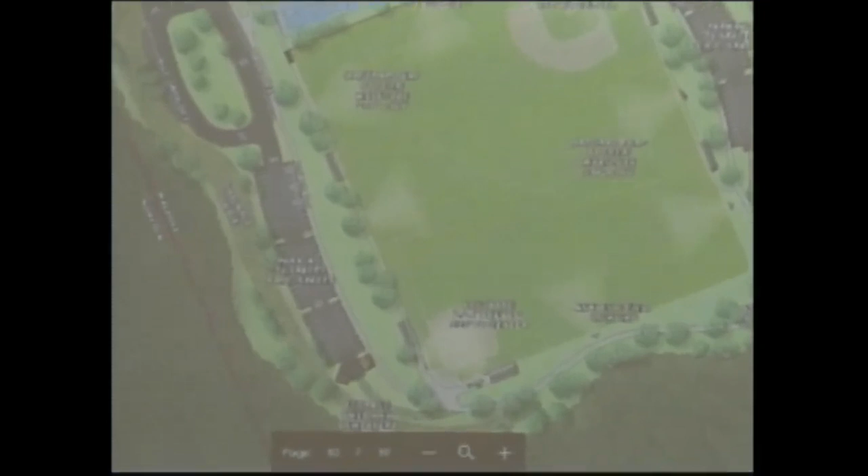Our recreation plan, or this is Walpole's? Aaron, how much land is that, do you know? I don't remember. Sure, it's listed in there somewhere. The Recreation Department did a survey years ago, and the results are on the website. I believe it went under land use, and then there was the recreation survey, and then we've done the open space and recreation survey, and those results are in there. I believe recreation and open space was 2016.

But we don't have any land identified for new recreation fields, correct? Correct, because there is none. The survey said we need so many ball fields and soccer fields. So we have an updated open space recreation plan, but not a place to build them. And we have a shortage, is the bottom line, right? Right. It's quite a nice plan. Bold. Let's get our own. What's the next step? What do we got to do?

Thought it was the old airport for a while. Need somebody to tell us how to use our land, all those funds we have in our Conservation Commission. What happened to the old airport? Some of it they built houses on. 120 acres of it was bought by a conservationist. It's conservation, privately owned, held by a land trust headed by a Norfolk resident. It's a habitat for tall grass birds. Have you ever heard that term? I haven't. I'm not making it up. Run down to Audubon, do some research.

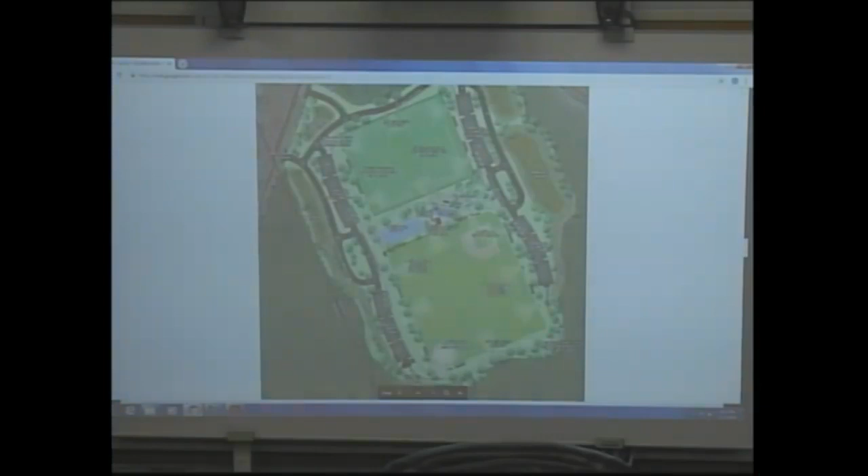2019 meeting schedule, we have a listing there of all second Tuesdays essentially, aren't they? Correct. All right. So I have turned off my Bluetooth, and I will put them in my calendar without it disturbing you, and you can rest assured you'll have to put them in yourself.

Unanticipated new business. Well, I received a letter from the gentleman sitting on my right who says essentially that he will not continue with us as a member of the board effective 5/7/19. So that means we will have a, by the way, when is your term up? The following year. So there's a one-year term available to be filled, and that's filled generally by appointment, isn't it? Between us and the selectmen? If this is in time, this may be able to be on the ballot. On the ballot? Oh, okay. My intention for doing it at this point and so early was that it would be able to be up for election. Oh, that's good.